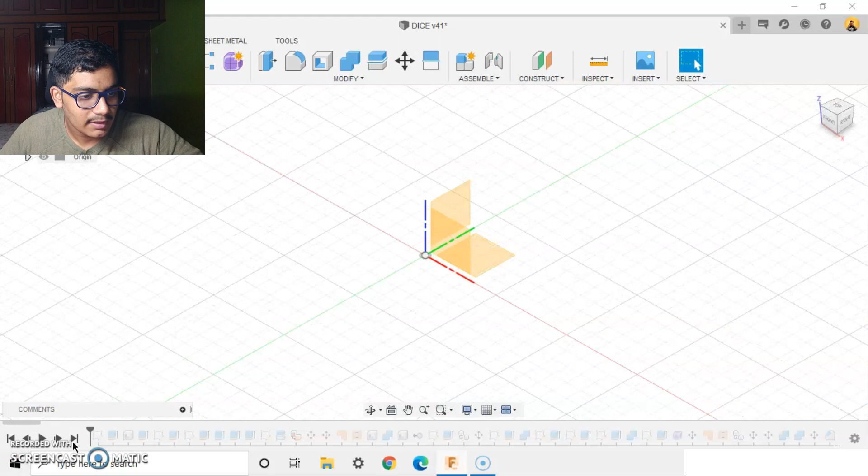So let's get started. We'll be designing this, but I won't be completely designing it, I'll just be running through my timeline. So I'll go back to the first, go to my home view, see my origin here, and I'll be traveling through my sketches.

This will be the constrained environment in which we'll be working. I'll just inspect this. This area will be around 2.025 into 10 to the power 5 millimeter square, and the length will be 1100 millimeters, and this will be 1000 millimeters. So I'll say next.

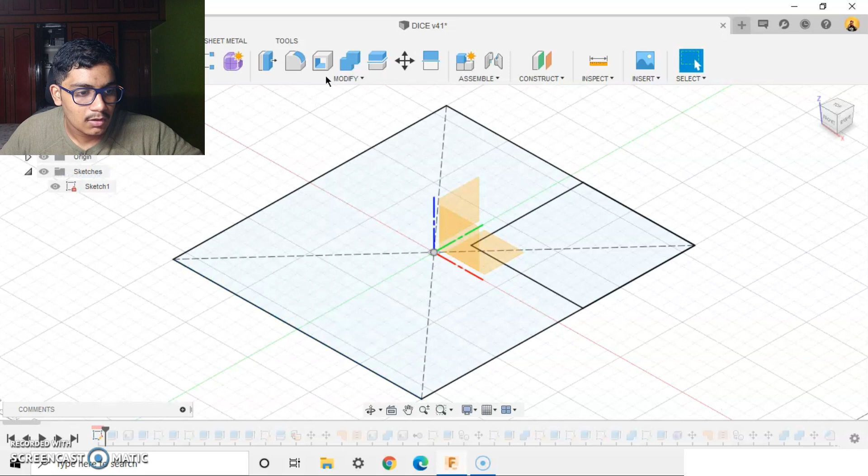I made the total space here. I've just increased the opacity rate. I even made the void space in which I won't be designing anything, so all our designs will be only in this region. The void space will be empty.

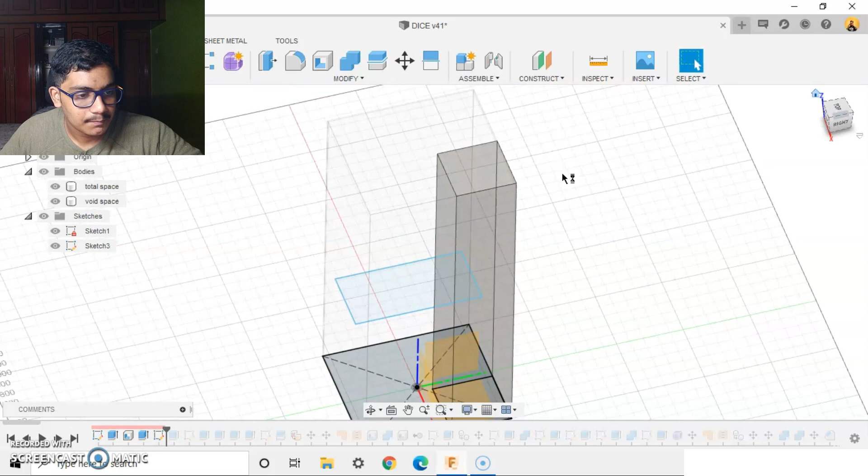And I made a basic table setup here in which our desk will be made. I just used common features, extrude, nothing else. For now I'll be...

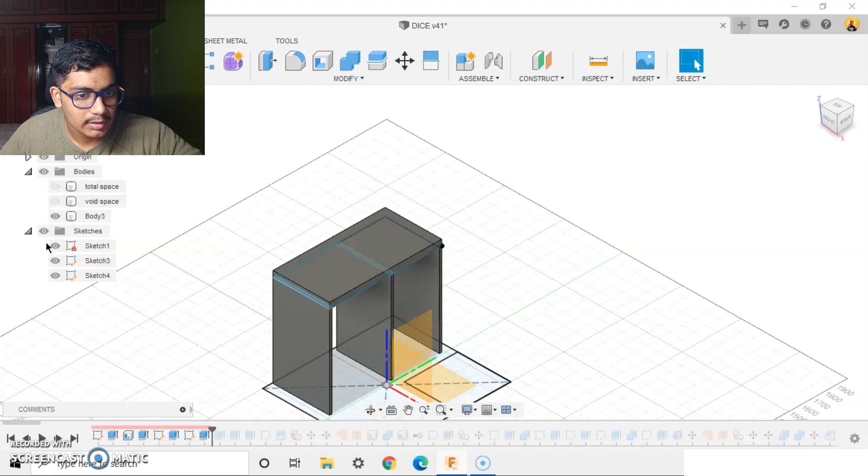hiding the total space and the void space. I'll not be showing them right now on the sketches. Okay, next.

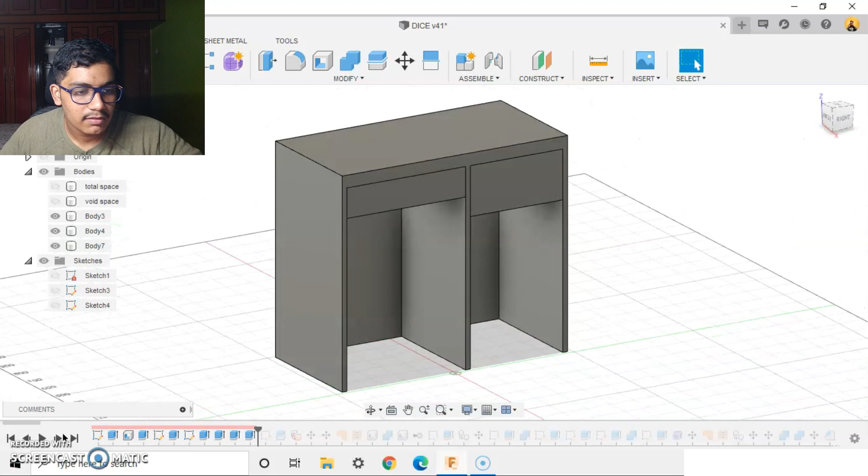This will be the keyboard drawer, this will be the drawer for space, storage. And I just used common features such as extrude here. I didn't use anything else.

I shelled this part out, and it looks like something like this.

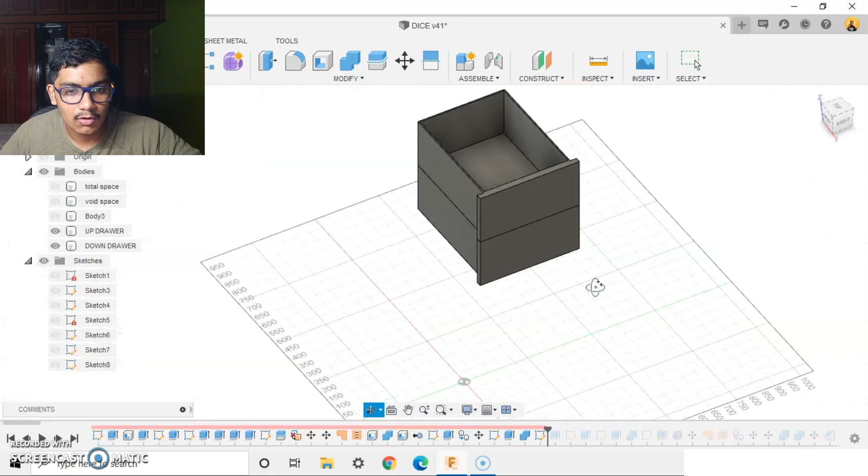I'll just show my up drawer and down drawer. Again, I used the basic features such as cut and extrude here, and shell at the top, so that it looks something like this.

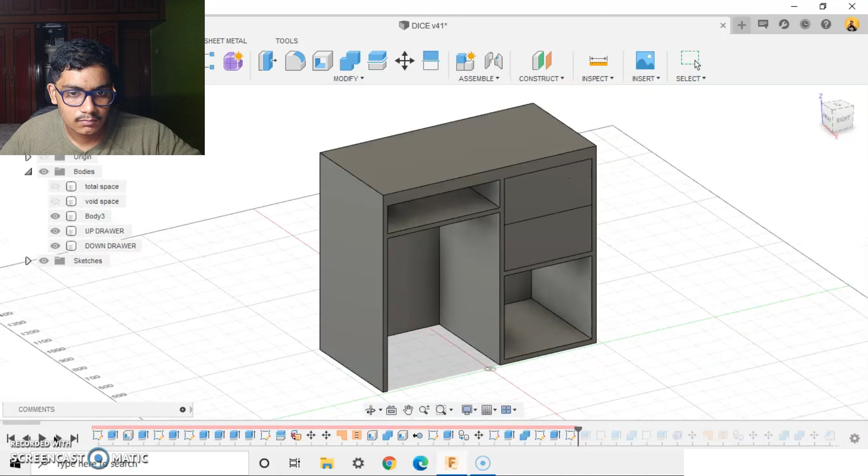Again, this will be the keyboard place area, and this body will be separate, something like this, attached to this, where you can pull it, and we'll be putting a sliding joint later on.

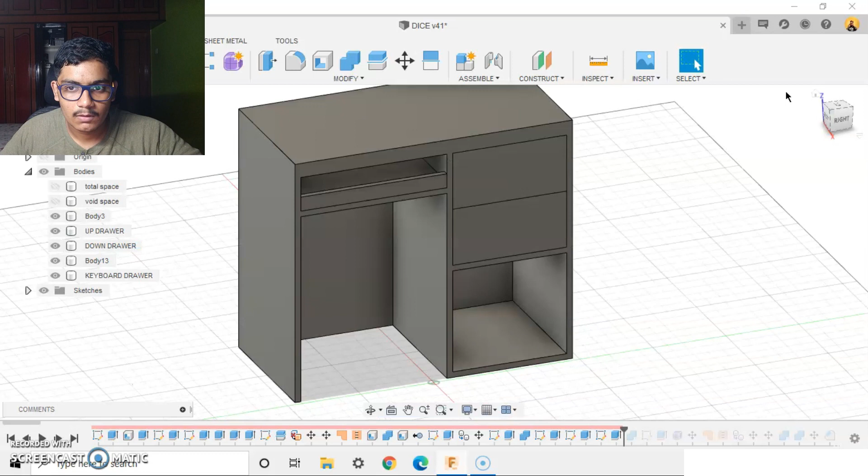I made this with forms, just a drawer knob so that it can be used here, and we can joint it later on. I moved it and made this into one body.

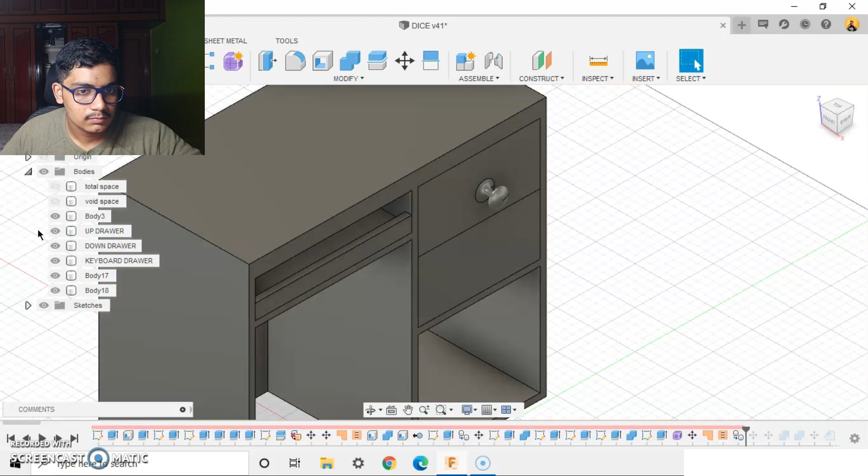I chamfered here. So this will be the top region where we'll keep our printer and the Wi-Fi router. Again, I used some chamfers here.

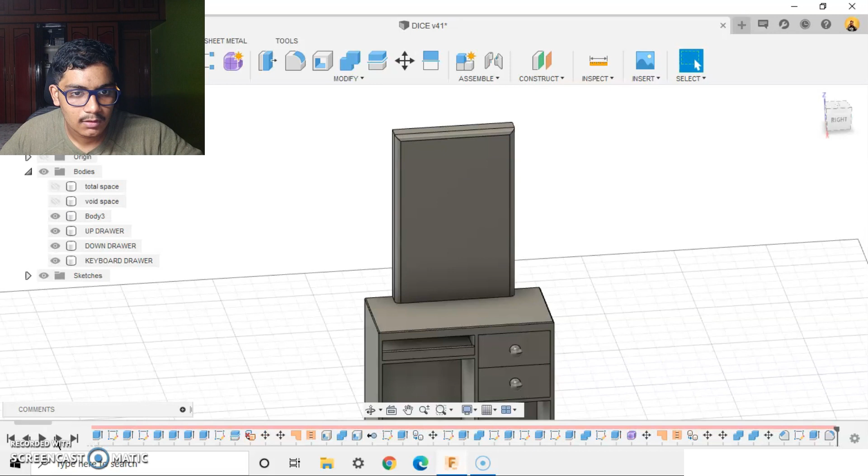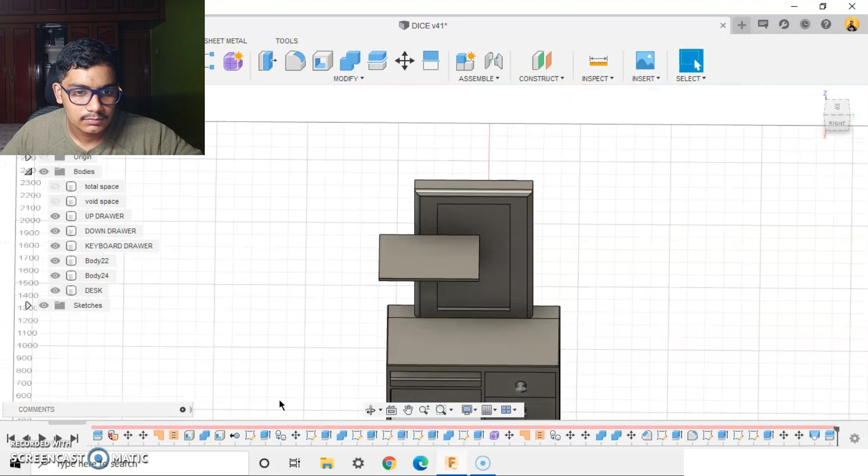This will be the place where we can put some bulletin or sticky notes or anything you want. I made two stands here, using nothing but the loft feature, a rectangle here and one more here.

And I just made a copy of this, and I am aligning it with respect to this, so it looks something like this.

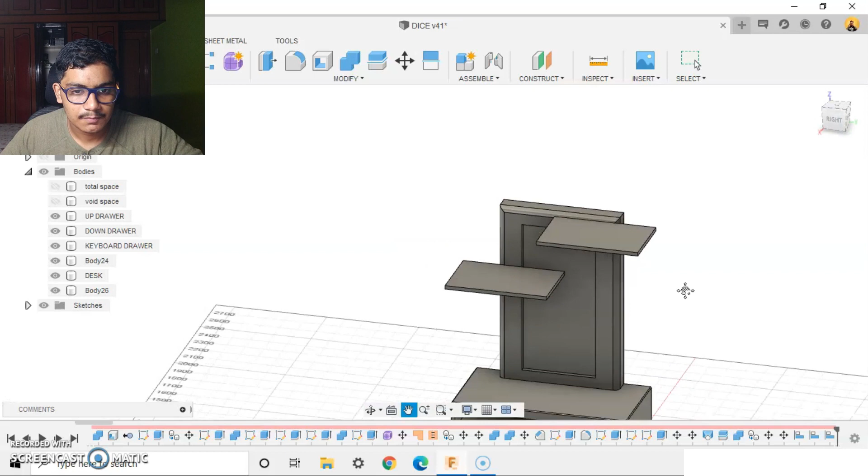And here I am making a few cup holders at the end of the table. We'll just make sure that they are not exceeding the total space given. I'm just making sure that it looks good.

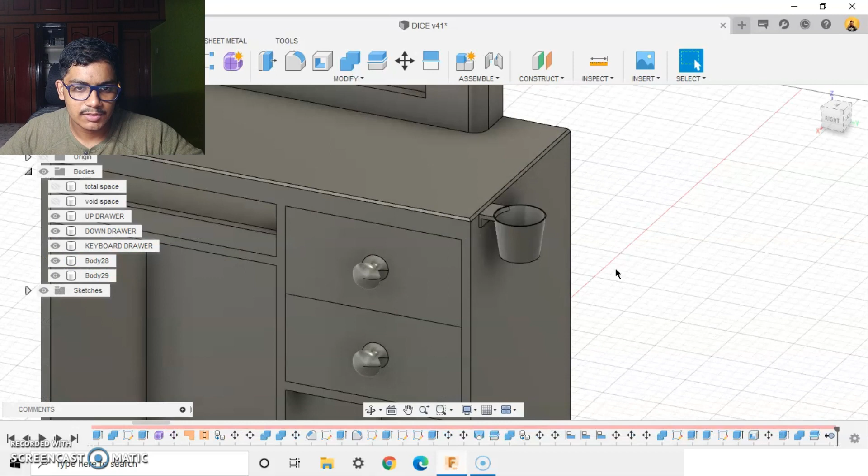I made a copy of it, and here I am making a dustbin holder, using the same features such as extrude, cut, nothing else. Again, same.

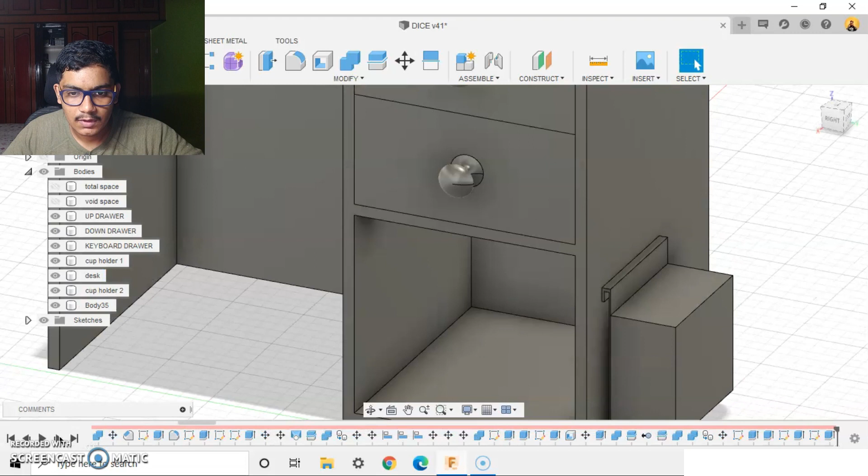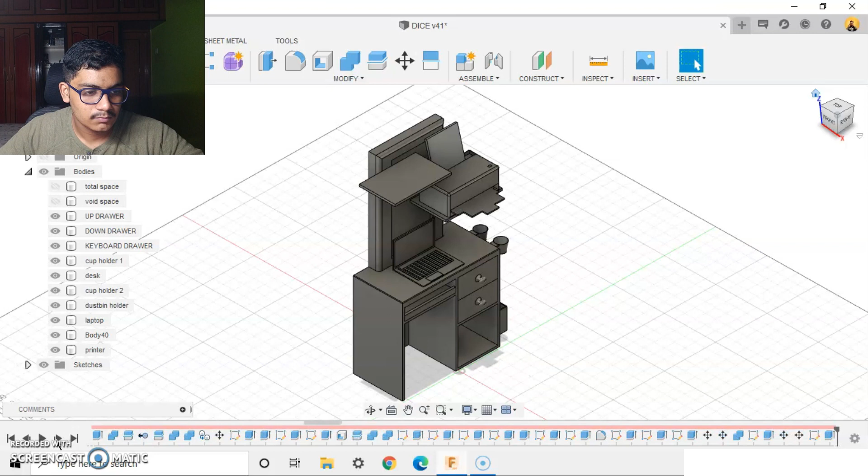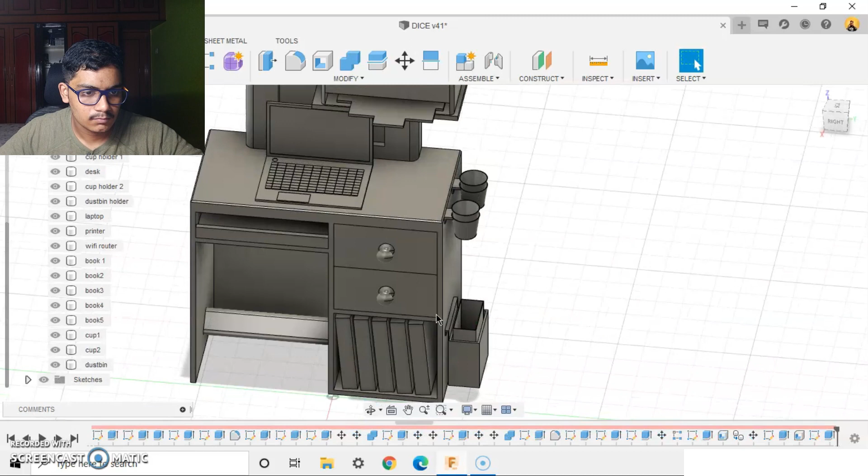Just making the other accessories which are compatible with this desk. Just making a switchboard here, again using these basic features such as extrude, hole.

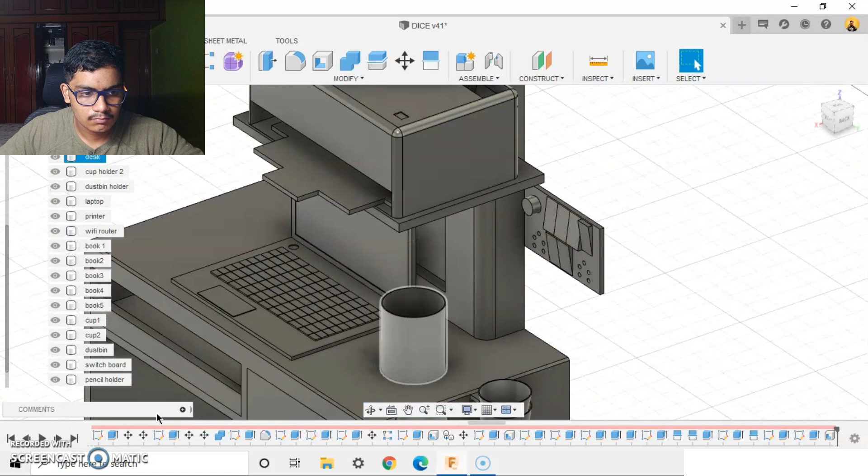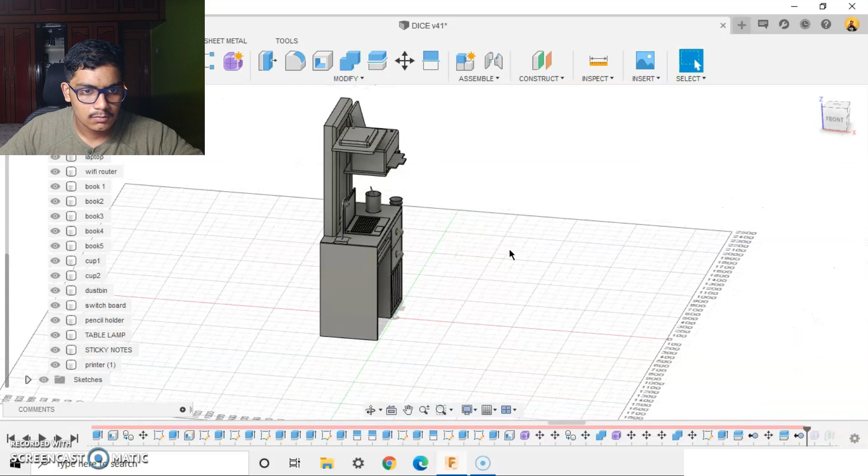So wait, let's not go to the chair yet, so we are done with the table. You've seen all the accessories I've put here, just using basic features. I didn't use any extra features, just sketches, extrudes and everything else.

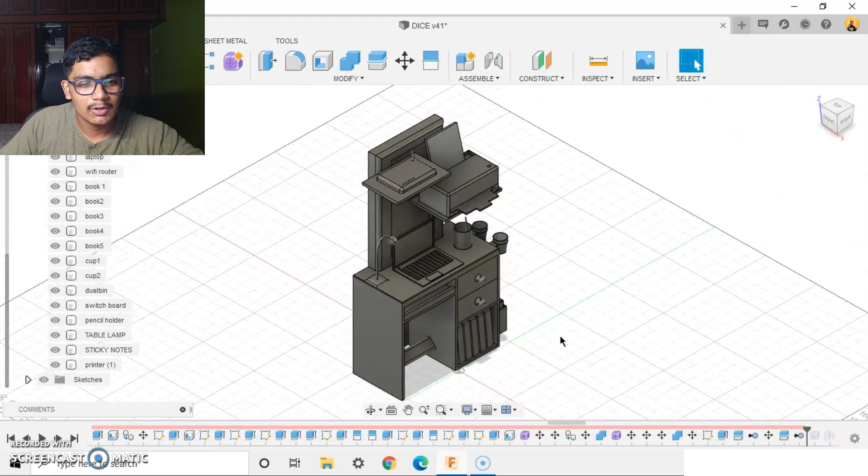So this will be our desk. I won't be putting any, like, bodies there. I'm not converting them into components. So I'll just make the chair body now.

I made this using forms. I didn't do much, I used a cylinder here, then I just created a pattern, making a circular pattern. I drag this down, here again a cylinder.

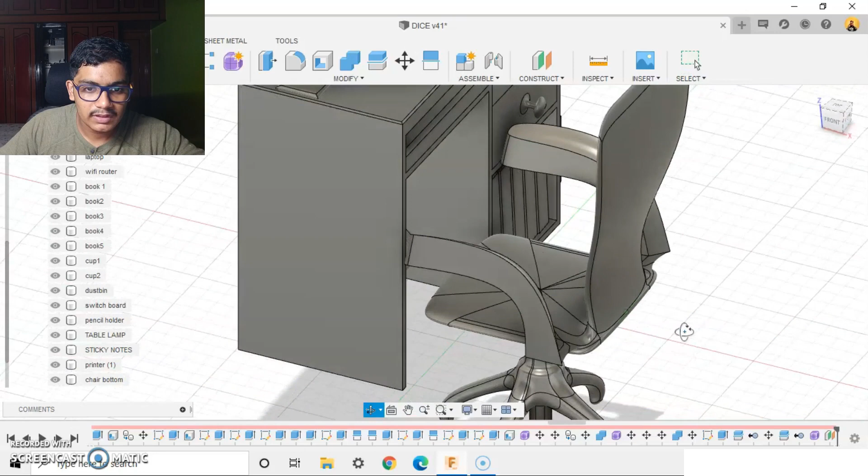Using the edit form, I made this, which looks like a chair. The frame of the chair.

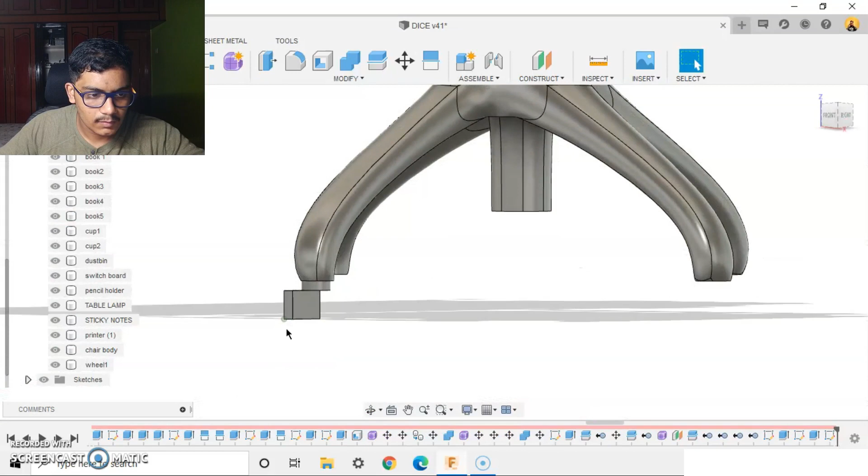So we'll be making the wheels now. Again, I'm using simple operations here such as extrude, cut, join, combine bodies, chamfer, etc. Make sure that you put it on all four sides.

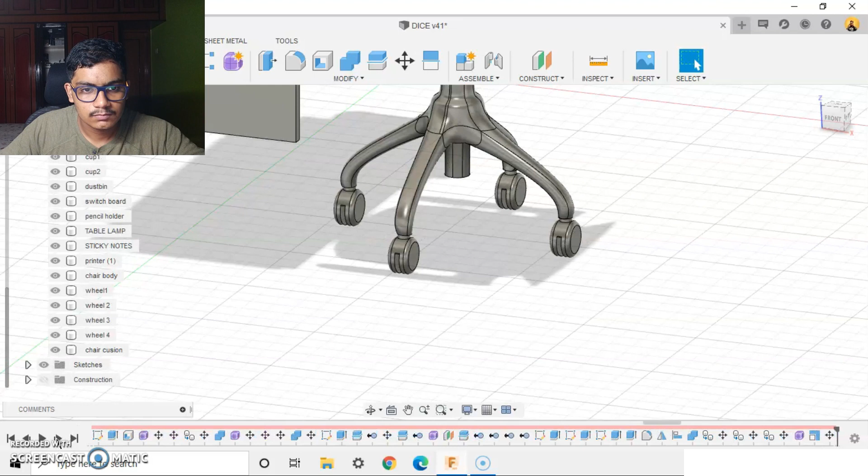Just placed it there. I'll just see my total space and my void space, so nothing should be interfering with it and it looks good.

Now I've made them into components. Then I'll be putting the joints now.

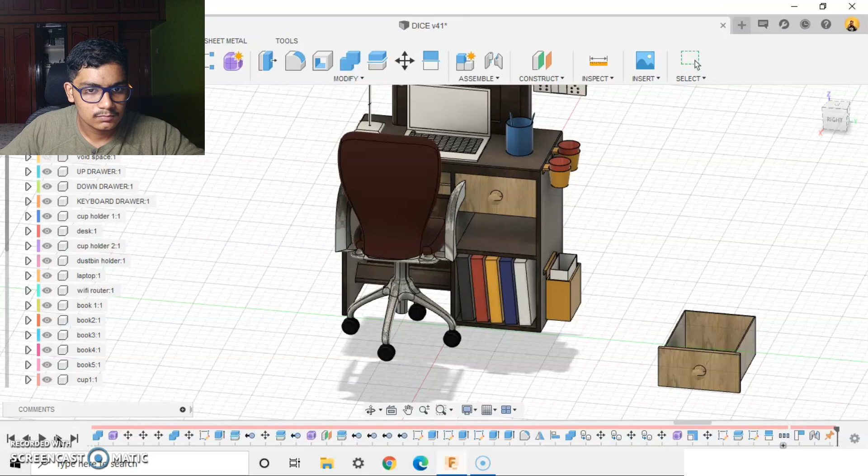I'll be making them as a slider joint here. The desk will be a rigid body, it will be grounded. All other things will be a rigid body.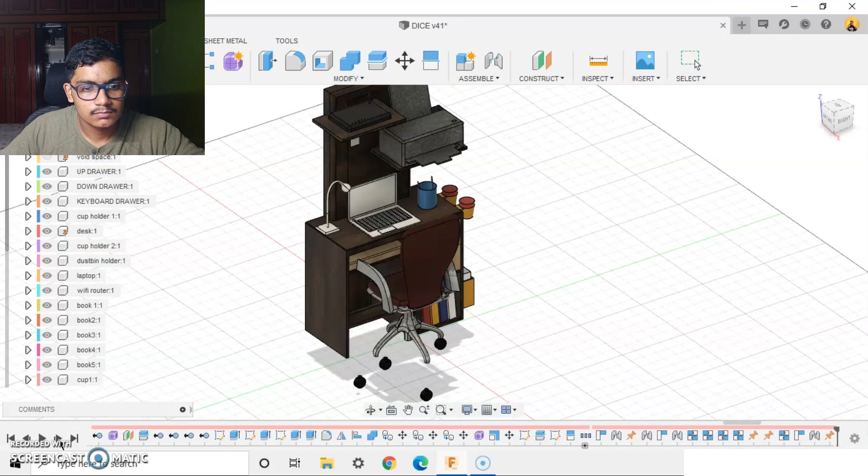You can see the slider joint with joint limit here. I put it for these two drawers as well as the keyboard drawer. And I used a revolute joint here so that I can revolve for all the four wheels.

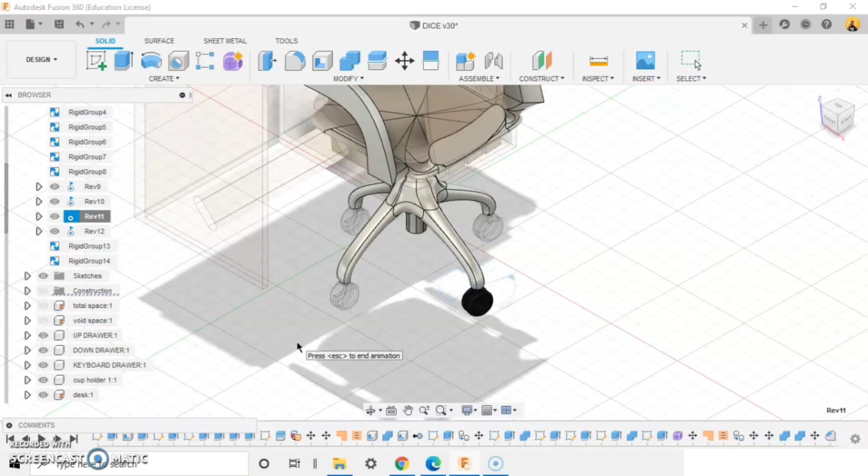Put a few stickers here for the textbooks. So this is how I designed the work from home setup.